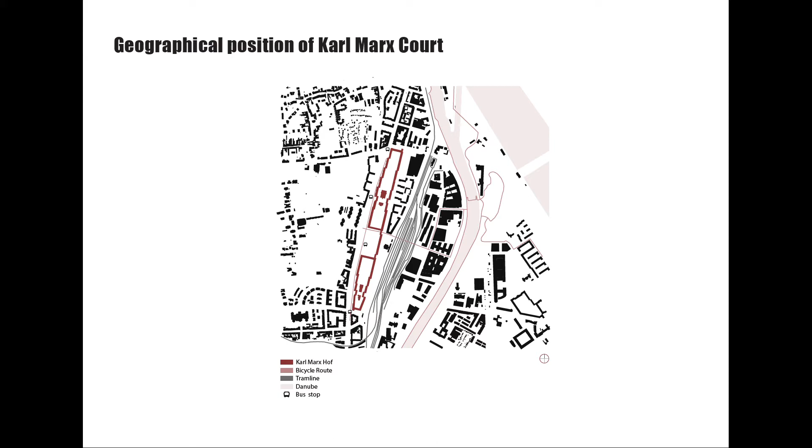The geographical position of Karl Marx Court: the following slide shows the geographical position, this is the site plan of Vienna, and the next diagram shows a close-up view. Karl Marx Court is situated in Heiligenstadt, a neighborhood in the 19th district of Vienna. The third diagram shows its position; next to it there is a tram station, and it spans 4 tram stations due to the building length of 1 kilometer. This figure ground map shows the traffic position in relation to the court and Danube. Here we can see in detail the bicycle route, the tram line, the bus stops, and the river Danube on the right side. We can feel the huge scale of this complex as well.

However, although the complex was primarily designed according to the needs of inhabitants, times have changed, and we have noticed a few disadvantages when it comes to dealing with new parameters. So we tried to identify the problems and awareness of current conditions after the COVID-19 pandemic. The problems are: the initial design did not foresee balconies for everybody, a deficiency of balconies and terraces and therefore natural ventilation; small windows leading to lack of natural light due to the construction of the terrace; insufficient staircases which do not allow keeping social distance due to their initial design and insufficient width; small apartments compared to big families; lack of rooftops due to the building design; and lack of social activities.

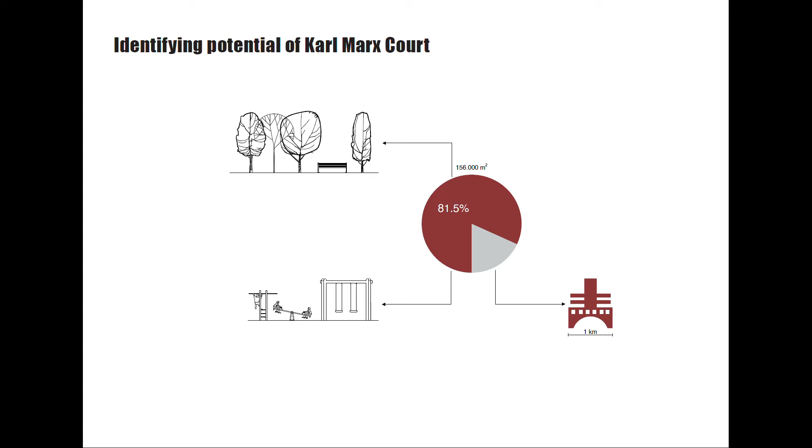We have also tried to identify the biggest potential of the complex. The following diagram shows great potential for green space. As already mentioned in the historical background, 81.5%, or 156,000 square meters, of Karl Marx Hof was left open. The courtyard was designed with green spaces for residents to enjoy, especially for youngsters. This point is very important for our concept, as we want to rethink the usage of the courtyard, as well as the internal organization of the building. So the question remains: how to find a new sustainable strategy for this complex of buildings, taking into account both the courtyard as well as the inside of the building.

So, our conceptual program: we have noticed the big advantage of having such a large courtyard that allows many interventions and can be connected with the internal organization of the building. We would like to propose several spatial interventions for both outside and inside of the complex, in accordance with new parameters and safety measures. We want to think about the future, adapting this building without destroying its important architectural heritage, and strengthen the sense of belonging and identity of the community as well as the initial concept of the building. So we have defined our goals, pros and cons, and vision.

We want to raise awareness. We want to strengthen the sense of belonging and identity. We want to maintain social life, propose spatial interventions, and design with new parameters to adapt to the new realities, rethinking the outdoor space and the internal organization of the whole complex.

However, we have both pros and cons for these interventions. We want to revitalize the space, but there is a fear of gentrification. We want to revive the outdoor space, but there is a possibility of infection. We want to maintain social activities, but there is still a privacy disturbance. And we want to develop the complex for the future, but then it can be too drastic.

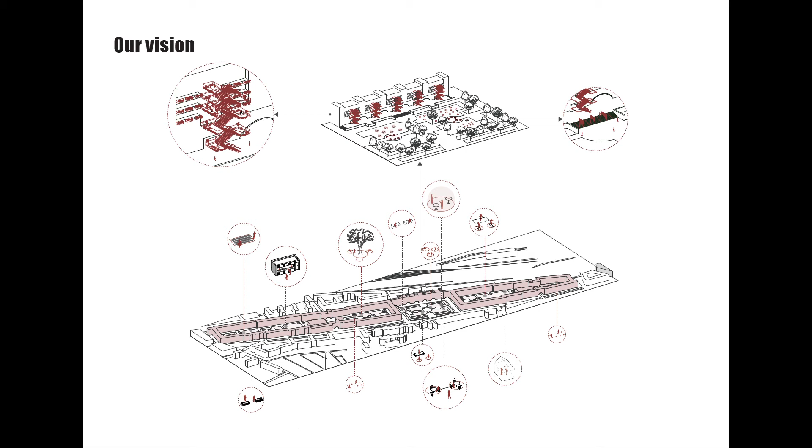In the future, we can see here the image of our project proposal. Our vision and main goal is to create an interactive place between the building and the courtyard, having in mind the whole COVID-19 measures. I will now go into details with our concept for both the courtyard and the internal organization of the building.

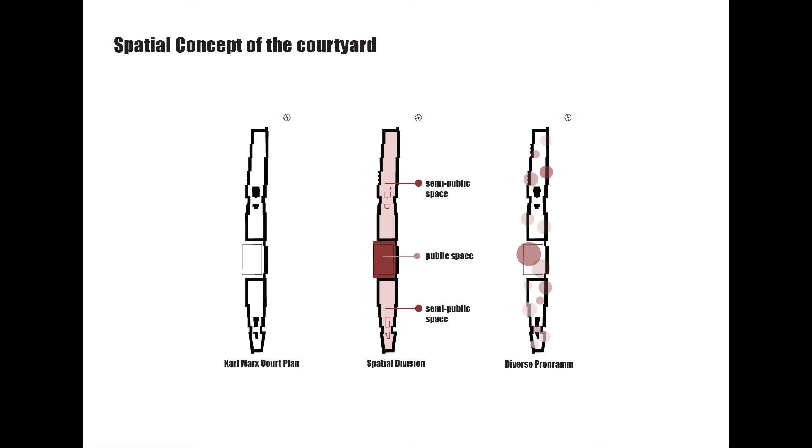So first I want to talk about the courtyard. We have defined two types of spaces: semi-public space and public space of the complex. Depending on the spatial division, different functions are distributed in Karl Marx Court. The middle part of the court includes public gatherings such as cafes, cultural events, picnics. Semi-public spaces are more intended for residents, for functions such as urban gardening, farming, outdoor activities, children playgrounds. So this is the functional program.

It allows diverse program functions, and it strengthens the sense of belonging and identity of the community. According to the social distance measures, these spatial interventions will increase social interaction within the people, especially the residents. Urban gardening and farming are good for mental health. In addition to producing food, it gives more freedom for a daily routine.

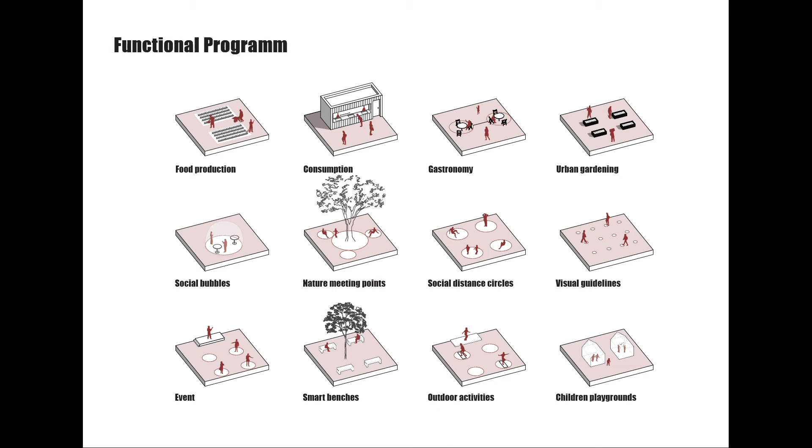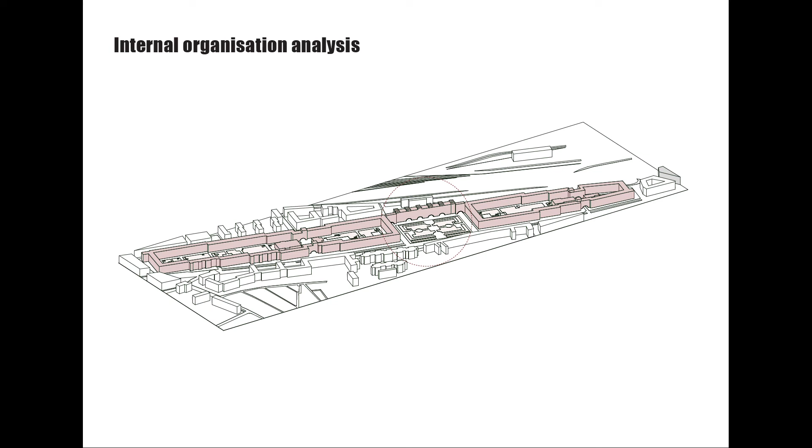Now the second part: we want to talk about the internal organization analysis of the complex. As already discussed, the complex is 1 kilometer long, so we have tried to understand the anatomy of the complex itself, and we focus on the main part of the building, which is the central part of it. So, the problems.

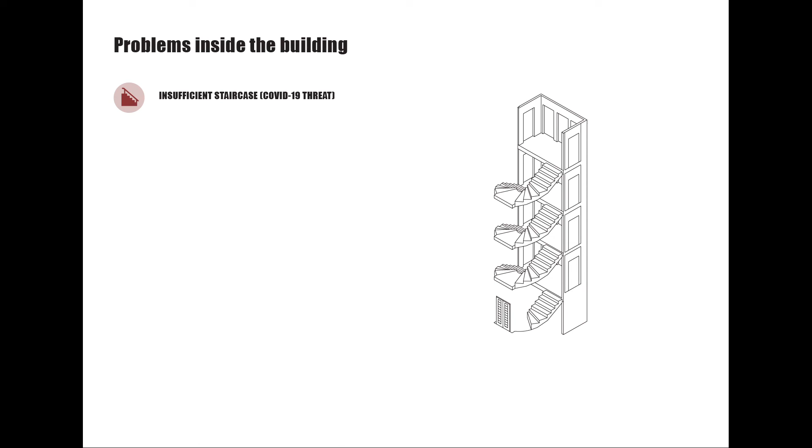We see as a problem of each building in this complex its vertical staircase, which is repetitive, and due to the initial design of the building, it does not foresee keeping social distance. This is a big problem of the complex. There is a threat of contagion of infection, which is why we want to rethink it. So we have one design solution.

We have defined the addition of an external fire staircase in front of the buildings. We have designed a temporary external addition to the complex, which will solve the problems with the staircase. It is designed for two-sided direction, and it connects the courtyard and the terraces of the residence. Our vision and main goal is to create an interactive place between the courtyard and the building.

So an additional external staircase would allow residents to meet outdoors. The priority would be nature, light, greenery. Green spaces prove beneficial to building occupants, and even the building itself stands to benefit. Plants reduce energy usage, plants refresh the space, and can even provide fresh vegetables for the residents.

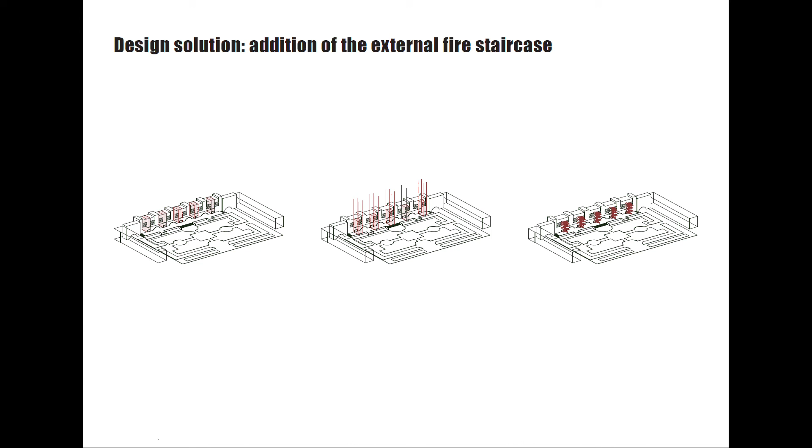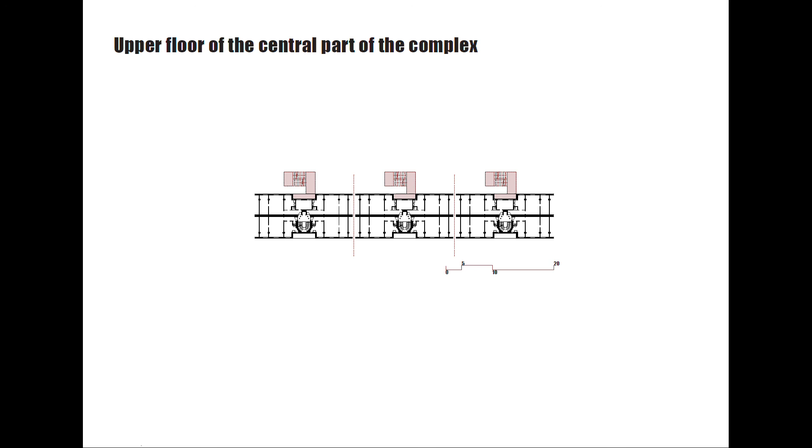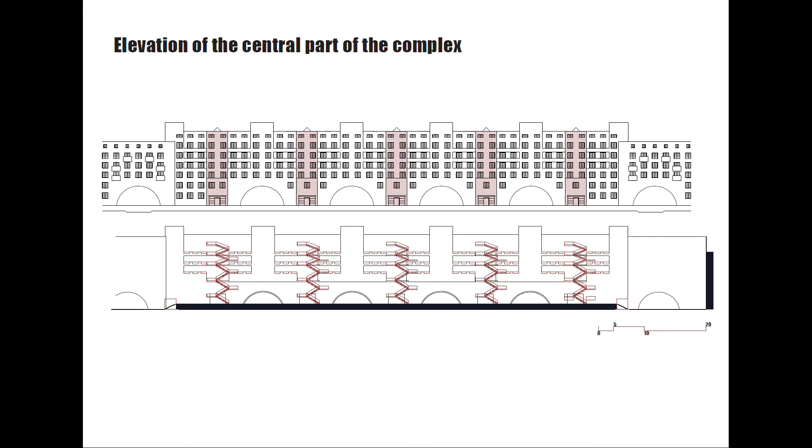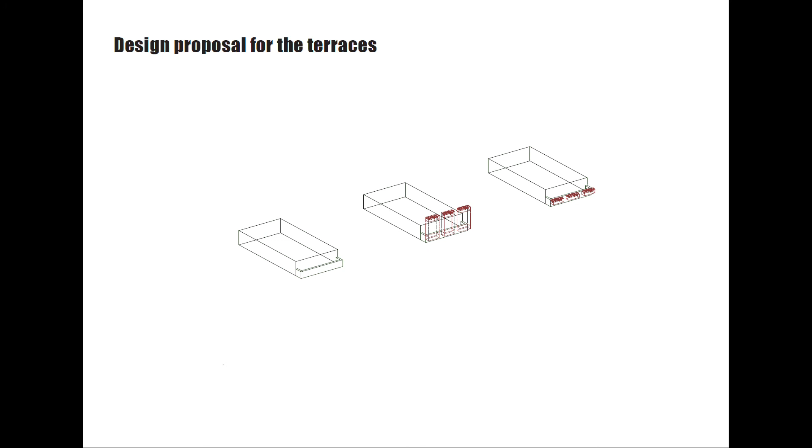Here we can see the design proposal for the terraces. We want to make the terraces green. We want to revive the complex. We want to renovate it. And this is the detail of the terraces, where we want to connect it with the proposed external staircase.

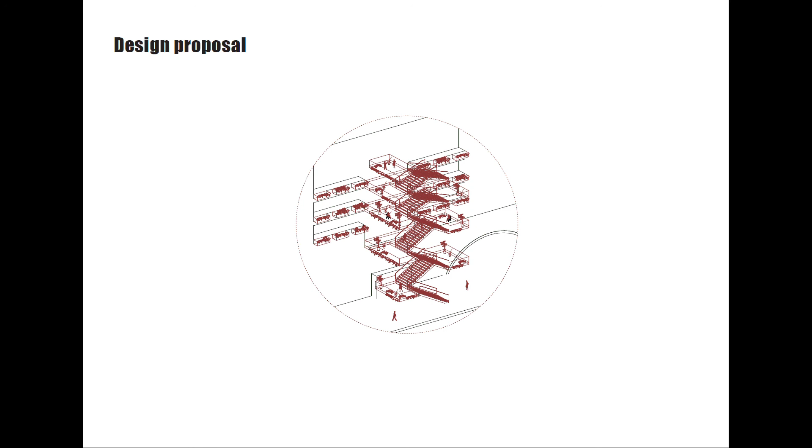So we want to create a vibrant and integrated complex with new ideas for improvement of the residents, for their life and their social life, and for the quality of their life in the complex. This is the scenario: our values will change, our lives and habits will change, and our homes will also change under that influence. With that in mind, we propose these temporary interventions for both the courtyard and the internal organization of the building, to maintain and keep the social life going on after the COVID-19 pandemic. Thank you for your attention.